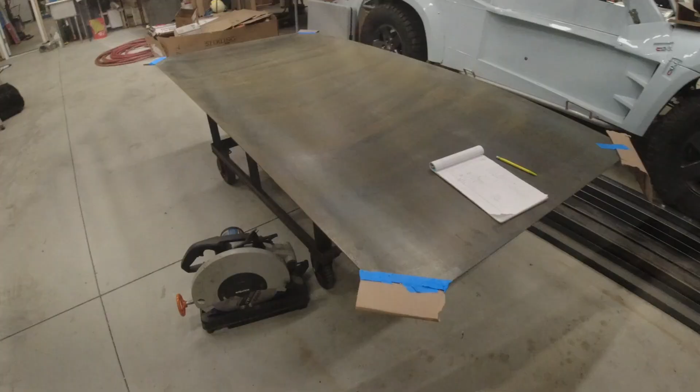Let me show you, I'm going to be building an all-metal workbench. Now what I have here is a 4x8 sheet of 10 gauge steel. I will be using this entire size for the tabletop.

Basically I'll build it upside down, flip it over, and then it will live on the other side of my truck over there. Now back when I was in Phoenix, I had a similar table that I built. The difference was that I used 16 gauge steel and it was a little bit on the flimsy side.

So I ended up having to put some wood underneath it. I didn't like the design. I wanted to use thicker steel this time, and that's why I picked this 10 gauge steel.

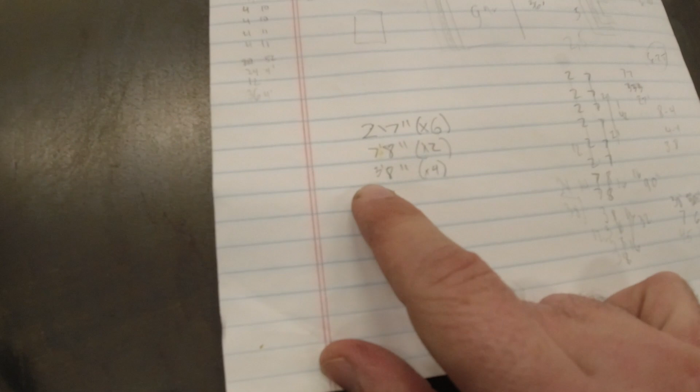Now what I need to do first is cut the legs and the side supports. I will be making 6 cuts at 2 feet 7 inches, 2 cuts at 7 feet 8 inches, and then 4 cuts at 3 feet 8 inches.

And this is basically what it's going to look like. I'll have a total of 6 legs and then 2 supports across there. I will make a few modifications to this table later in order to mount my grinder and my buffing wheel to it, but for right now I just need the table.

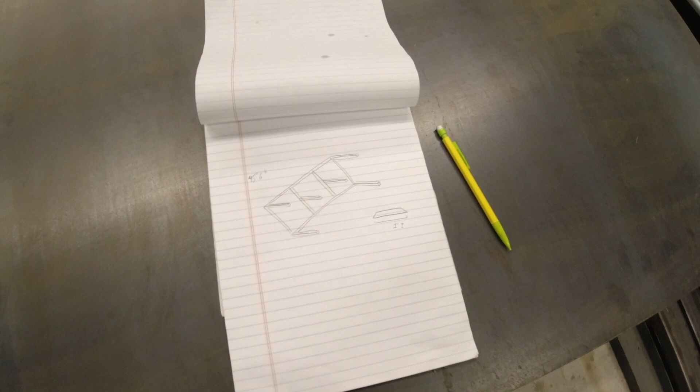So I will be using a total of 45 feet and 6 inches of steel just to build this. And then I'll take whatever's left from the 20-foot stick, which will be around 15 feet, and I will make a bunch of supports that I'll triangulate all of these legs with. So let's get cutting.

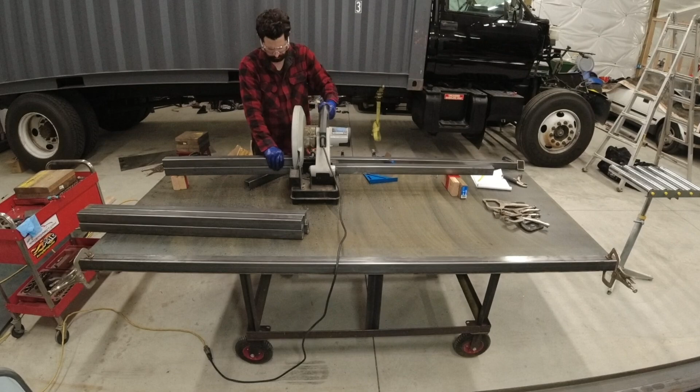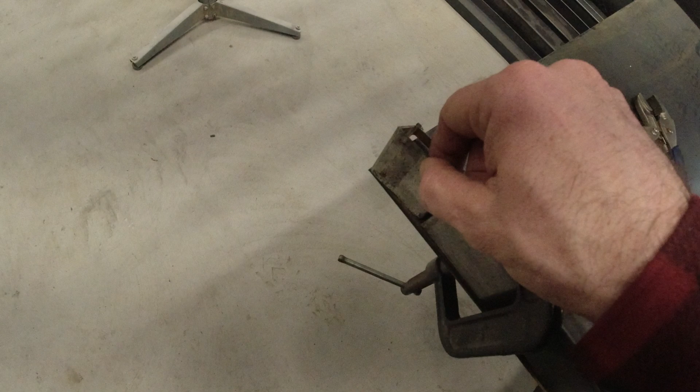Alright, now I'm not sure if any of you guys have noticed, but I've already made my first mistake. I have all 6 of my legs cut right here, but in my diagram, I have all 4 of the outside legs right up against the steel, just like this, and then the 2 inside legs are on top of the support.

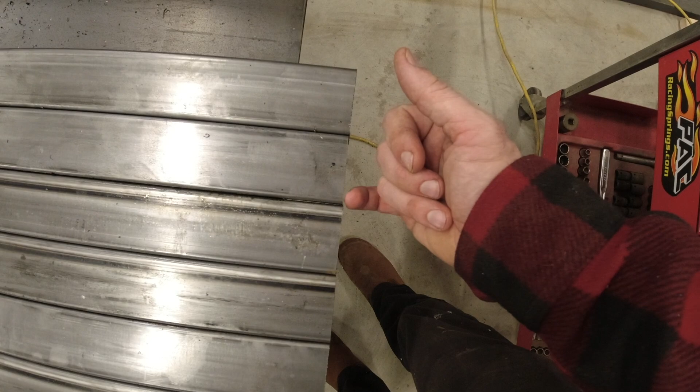So these 2 have to be 2 inches shorter than the other 4. So what I did was line up all 6 of these because they're all going to be just a little bit off, and as I'm looking down the edge, I realized the first 4 are all really close. These 2 on the end are maybe a little less than a 1/16 of an inch shorter, so I'm going to go ahead and cut these 2 inches in.

I will be capping the ends and then putting on adjuster nuts, so it will have a little bit of adjustment just for the natural unevenness of my concrete floor, which is quite frankly pretty terrible. So let me get these 2 cut 2 inches shorter, and then I will be able to hopefully start tacking everything up.

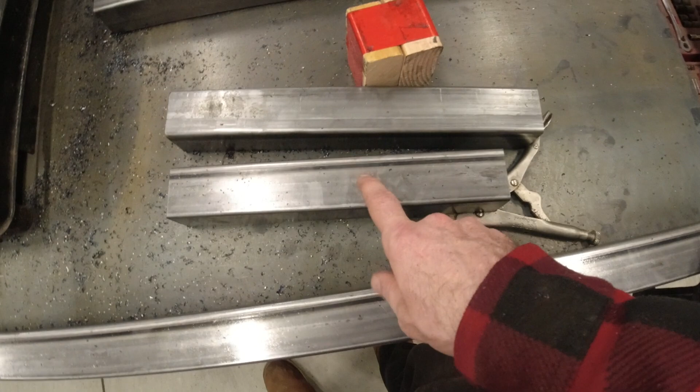Actually, before I tack it, I will probably go ahead and cut 12 of my 45-degree little supports right here like that. I don't know exactly the size that I'm going to go with. Usually when I'm doing this, I'll take whatever is like my smaller scrap pieces. You see I've got this one here and these 2, so I take the shorter one and then I'll end up cutting this at 45, and then I'll use this as my base to cut the other 11.

I don't know if that's exactly what I'll go with because it might end up being a little bit too short. So just kind of play it by ear. This is a little on the willy-nilly side.

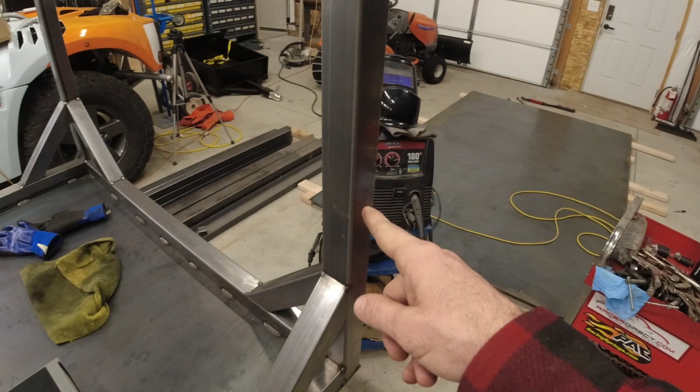Alright guys, I wanted to show you the table up close here. I finished all the welds from the table to the frame, but I have not yet finished the welds on these supports. Now on a previous table, I used 16 gauge steel for the legs, and when I welded the supports right here and here, it overheated the steel a little bit and the legs pulled in. It really bothered me. Don't want that to happen again on this one, so I went with .083 thicker steel.

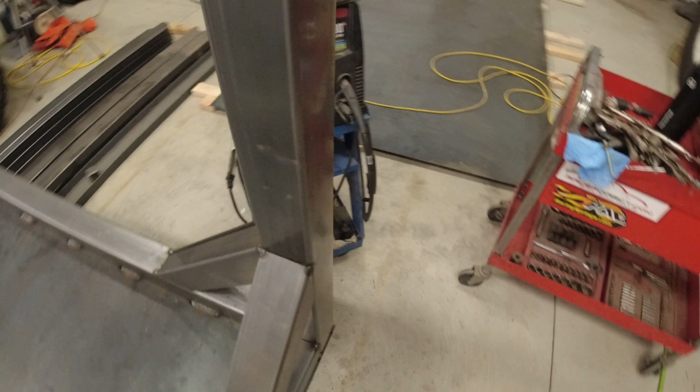And then when I weld these supports, I'll weld the outsides on all of them first, and then I'll weld the insides, and then I'll go from the inside out to hopefully dissipate the heat a little bit better. Once I do that, I'm going to be making the leg adjusters.

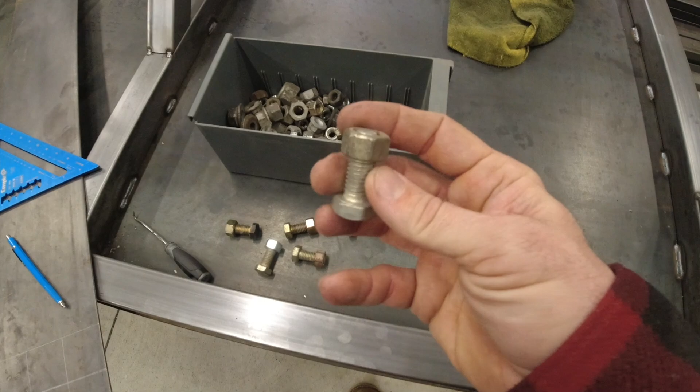For the leg adjusters, I've got 6-inch flat strap here that I will cut into 6 separate pieces and then drill out the centers. I will weld these old grade 8 and grade 5 nuts and bolts that I had lying around. I'll weld the nuts on the inside, and that way I can use the bolts as the adjusters. So let's get this all finished.

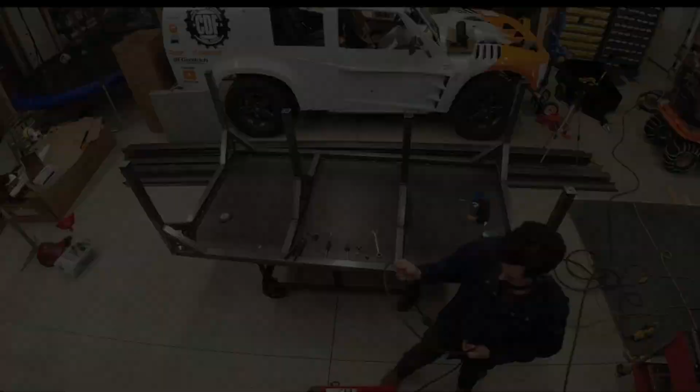Alright guys, the welding is all done. It looks great. The next step is going to be cleaning up the threads on these bolts with this die, and then using this tap to clean out the threads on the nuts. Anytime you weld them, they're going to get a little bit gummy, so this step just makes it a little bit easier to use these adjusters in the future.

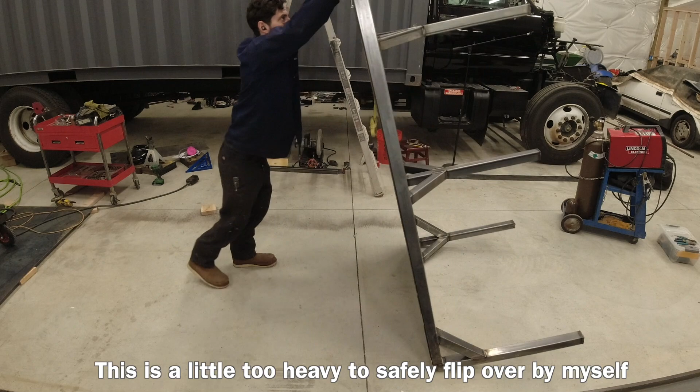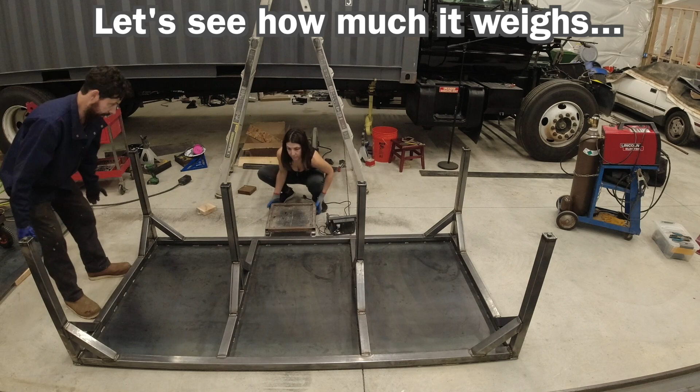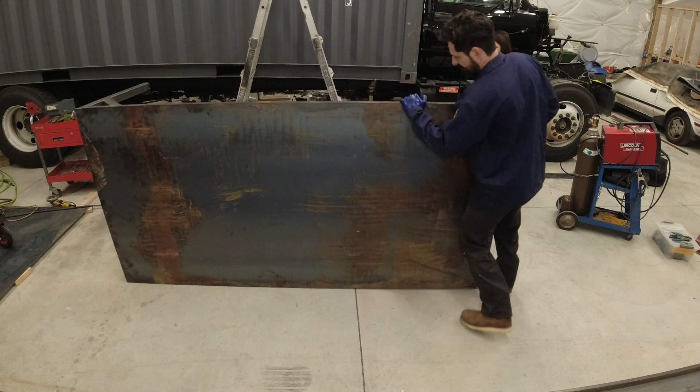It is 310 pounds. We did it!

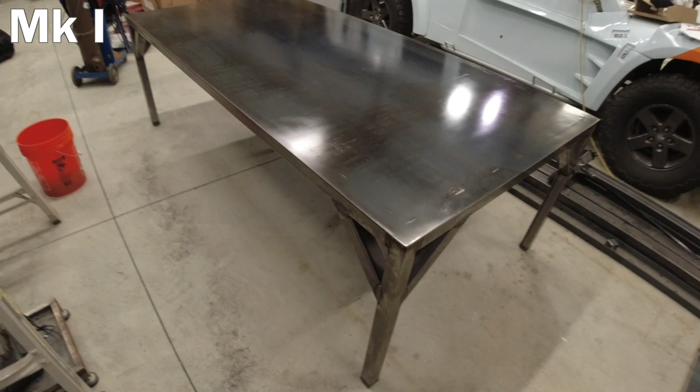Alright, so here's how the table turned out. Now would normally be the time that I paint this or send it off for powder coating, but I'm not actually quite done with this table yet. I'm calling this the Mark 1 iteration of this table. Eventually, I want to do a swing arm that pops out from the bottom that has my grinder, and then one that pops out here for my buffing wheel.

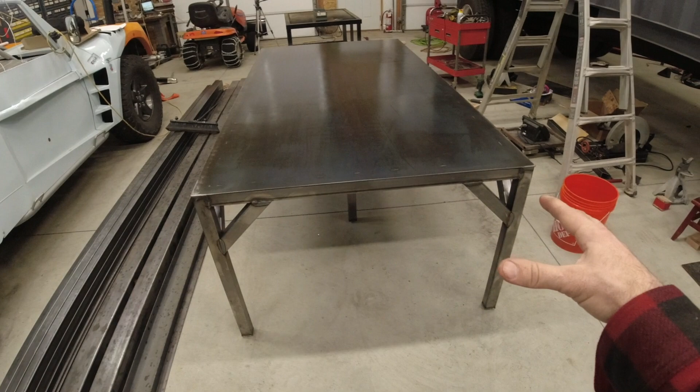And then on the end, I would like to have both my metal shrinker and my metal stretcher pop out. That way I can work with larger pieces of metal without having the tools take up a whole bunch of room. And since I'm going to be mounting those to it later, I really didn't want to have to grind down the paint or the powder coating to weld the tabs on.

So I'm going to leave it raw like this, and then once I make all those modifications, I do plan on painting the bottom to protect it from rusting, but I don't want to paint the top. I didn't like the idea of having paint or powder coating flaking off of here at any point. I would like to polish this up and then use some type of a chemical to keep it nice and rust free.

Most of the old timers that I talk to recommend using Gibbs penetrating oil, so that was my plan, but I've never actually used that on a polished surface in order to keep it from rusting.